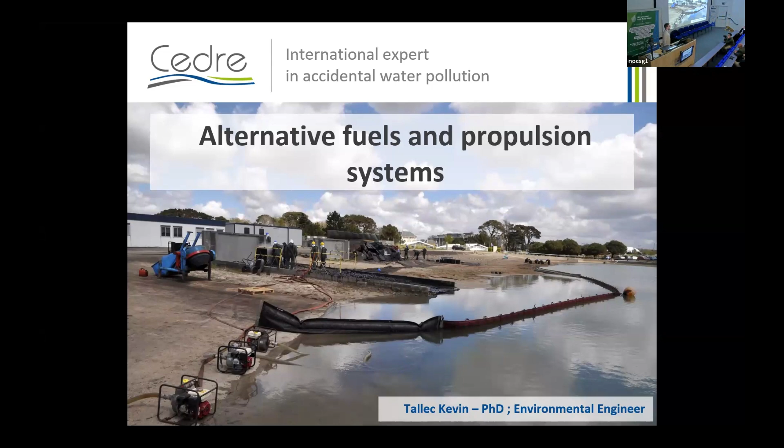So I am Kevin Tallec, an environmental engineer at CEDRE, and today I am talking about the development of knowledge on alternative fuels and their operational responses in case of an accident.

So CEDRE is an international expert in accidental water pollution, based in Brest, France for 45 years with a team of 55 people. And overall, we are working on pollutions in oceans, inland waters and seas, involving plastic waste, chemicals, and oils, and therefore alternative fuels. So now I have finished quickly presenting our activities.

I am beginning my presentation by reminding you of the definition of alternative fuels. So according to the European Union, alternative fuels are all fuels or energy sources that serve at least partially as substitutes for fossil fuels in the energy supply of transportation and can contribute to the decarbonization of the latter, as well as improve the environmental performance of the transportation sector.

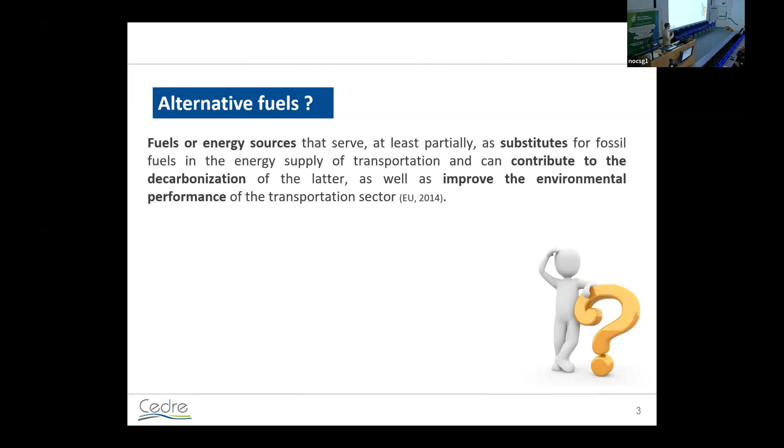In recent years, we observed a fast development of alternative fuels. And on this slide, I have a few examples of the technological advancement. So regarding ammonia, Wärtsilä developed a motor using ammonia as fuel. And they already announced the use of this system for two ships with a delivery by 2025.

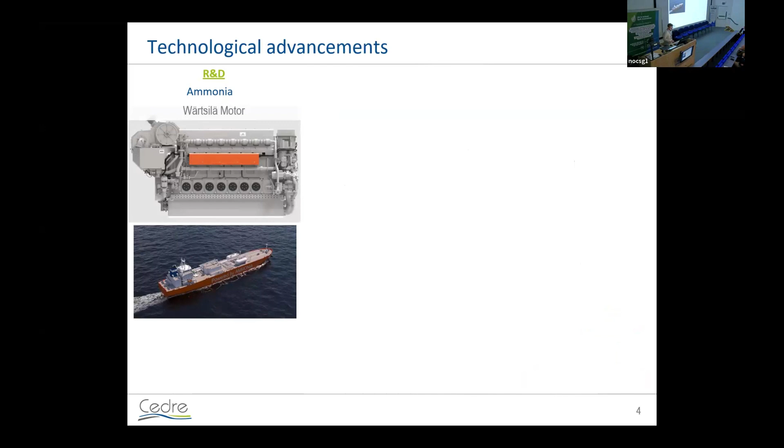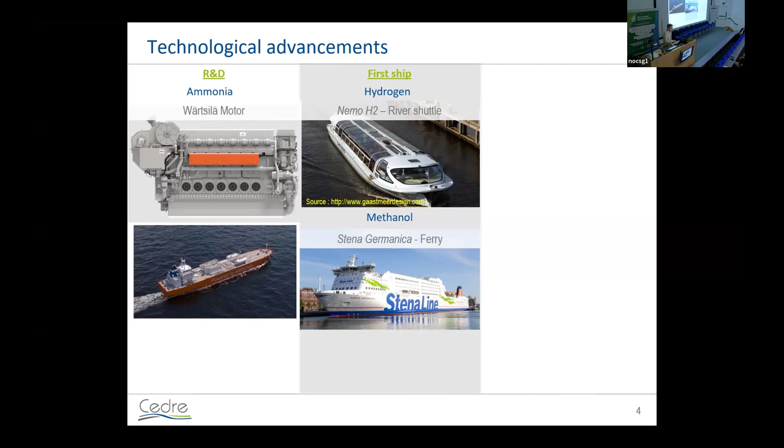Regarding methanol and hydrogen, they have been used as alternative fuels for several years now, with, for example, in 2015, the conversion of one of the world's largest RoPax ferries, the Stena Germanica, to become the world's first methanol-fueled RoPax ferry. And we have several options more extensively developed, like batteries, liquefied natural gas, and low-sulfur fuel oils.

However, although the development of alternative fuels stems from a desire to improve the environmental performance of the transportation sector, the fast development associated with the rapid market introduction can cause operational concerns in case of an accident leading to a spill. This includes managing potential pollution and the environmental impact or impact on human health.

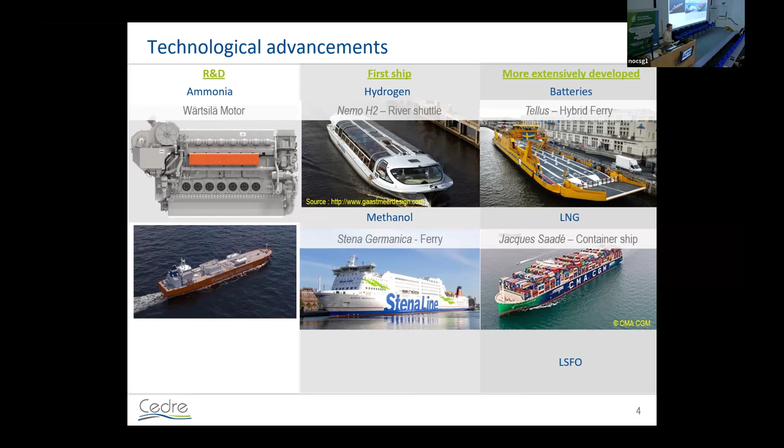At CEDRE, we are engaged in multiple areas regarding alternative fuels to provide advice and expertise in case of an accident. So in our laboratory, we focus on the characterization of the product and its behavior in the environment to perform modeling and drift forecasting. Meanwhile, we test response equipment and we study the adequacy of the equipment for the alternative fuel. And we use these results to produce emergency plans.

And finally, all documents are published and disseminated because we operate as a documentation center, and the documents can be used during emergency responses to provide support and to help operators when it is necessary. Because today we have more questions than answers regarding the operational responses in case of a spill of alternative fuels or an accident of a lithium battery, for example.

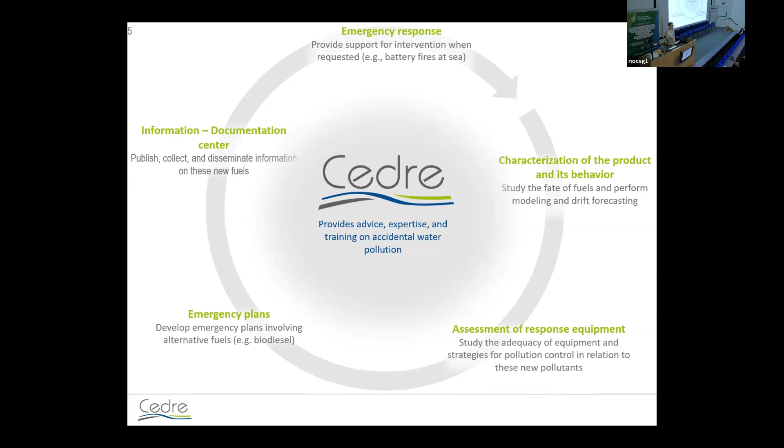The aim of this conference is to present several projects launched at CEDRE about alternative fuels to illustrate the need and the gap to provide appropriate operational responses in the future in case of an accident.

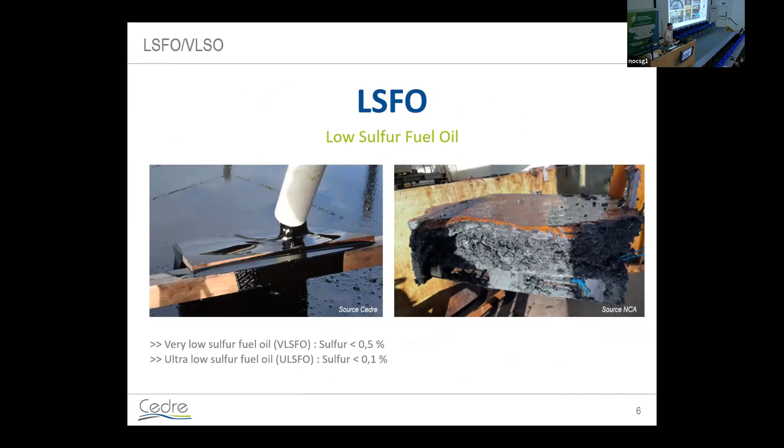So firstly, regarding low sulfur fuel oils, we have the European project IMAROS 2. The goal of this project is to enhance knowledge on the behavior of low sulfur fuels, particularly their mechanical recovery capacities at sea and their impact on the coastline. During the first IMAROS project, we observed low efficiencies of in-situ burning or dispersion as operational responses. Pumping and recovery is the primary response in case of a spill of low sulfur fuel oils.

However, during our laboratory experiments, we observed a large diversity of properties in low sulfur fuel oils, notably regarding the pour point. Therefore, low sulfur fuel oils in the environment can range from solid to liquid, affecting the effectiveness of the pumping and the recovery. Therefore, in the new IMAROS project, we are working with equipment manufacturers to adapt and optimize skimmers to handle the diversity of low sulfur fuel oils in case of a future accident.

Another interesting result in the first IMAROS project was the capacity of low sulfur fuel oils to penetrate into rock. Therefore, in the new project, we will study the persistence of low sulfur fuel oils on the shoreline and the potential impact on aquatic organisms over time.

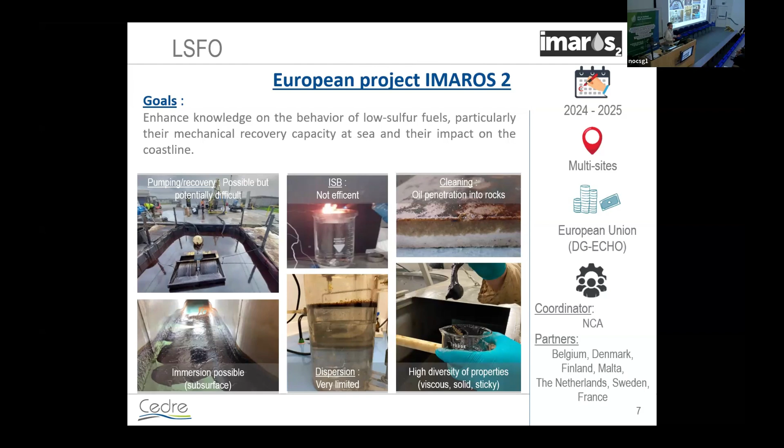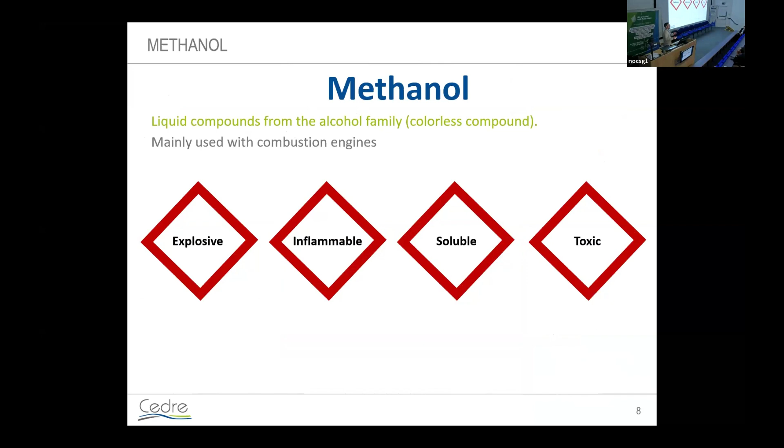Now, regarding methanol, it is an alternative fuel with several interesting properties like explosive, inflammable, toxic. And methanol has the capacity to produce a colorless fire. Therefore, it is very important to study the behavior of methanol in the environment to determine the risk level of an accident.

And in this context, we did last year a project to study the distribution of methanol between the water column and the atmosphere. We did this project in collaboration with the French Navy to spill methanol directly in open seas to obtain the crucial data of this project. And overall, we observed fast solubilization of methanol in water following the spill associated to a limited cloud formation.

This project also allowed the development of a tool to detect methanol in water in collaboration with a Swiss startup. It is a useful tool for operators to determine the risk level and the possibility of a fire in case of an accident. We continue the research on methanol, and we hope that in the future we can help in case of emergency responses.

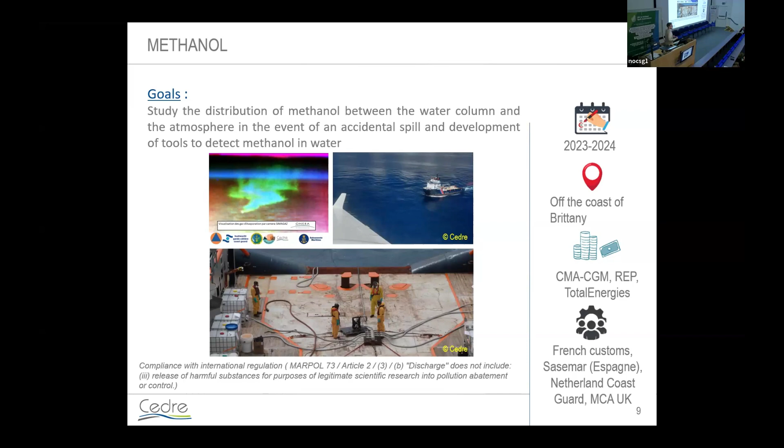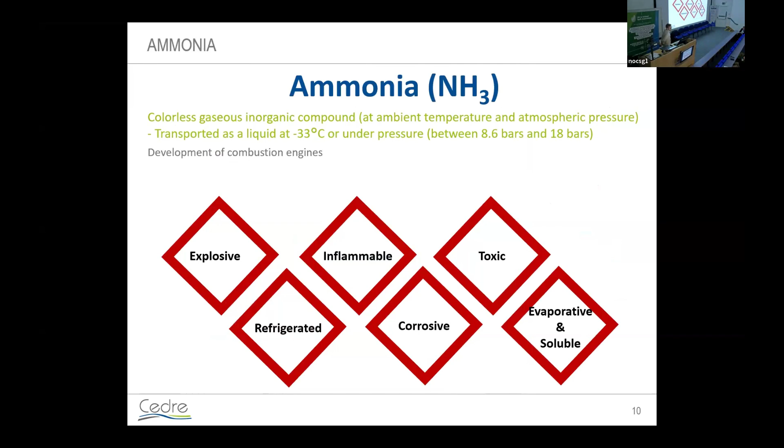Another interesting alternative fuel is ammonia, a colorless gaseous inorganic compound displaying several interesting properties like explosive, inflammable, refrigerated, toxic, corrosive, and evaporative. We know that ammonia is very reactive with water, and heat is generated when the two substances mix. The intense turbulence of the mixing process also generates aerosols, which affects the density of the toxic cloud.

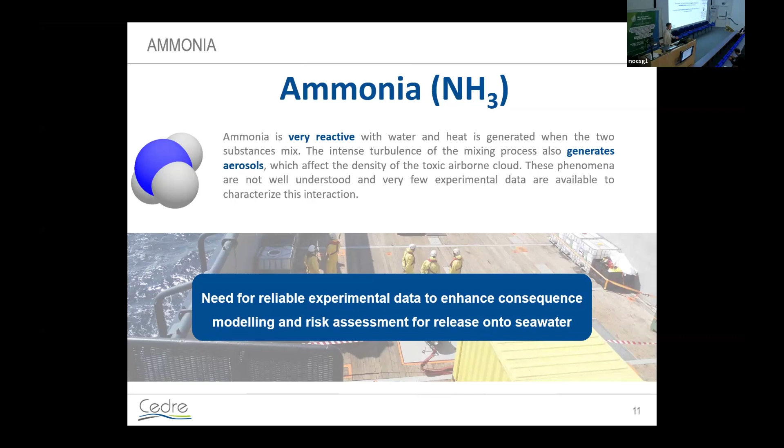These phenomena are not well understood today, and very few experimental data are available to characterize this interaction. Therefore, there is a need for reliable experimental data to enhance consequence modeling and risk assessment for release onto seawater. In this context, we participate in the joint industry project ARISE, and the goal of this project is to establish test protocols and to perform large-scale release of cold liquid ammonia onto seawater in order to test multiple detection and measurement technologies and to acquire the needed dataset to upgrade consequence modeling tools, capability, and reliability.

This project began this year, and the experiment will begin at the end of the year and next year. So we hope that soon we will have results to help operators in case of an accident involving ammonia in the environment.

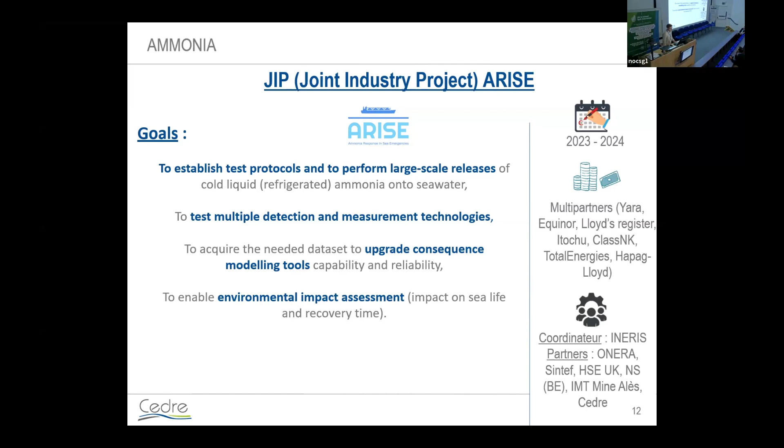And finally, the last example of this presentation is a lithium battery. So by definition, a battery is an electrochemical cell that converts electrical energy into chemical energy during charging and chemical energy into electrical energy during discharging. Lithium battery has several properties like explosive, inflammable, and toxic. Therefore, it is important to consider the risk of lithium battery as an alternative to common fuel.

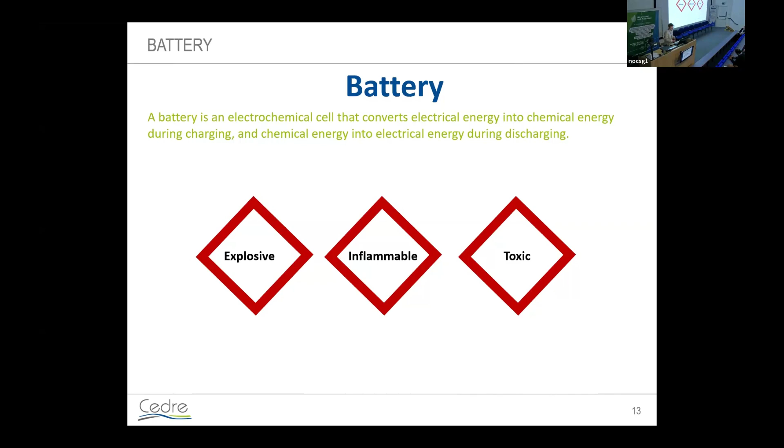And we launched a new project this year to study the composition and potential impact of abused or intact batteries on the aquatic environment in the event of an accident. In this project, we will develop tools to track lithium in firefighting waters and environments. And after, we will study the impact of lithium on several organisms to help stakeholders in case of a risk assessment involving lithium batteries.

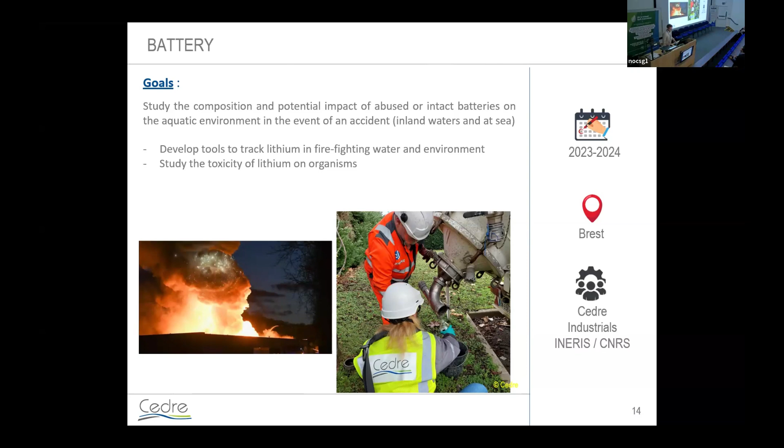Therefore, to conclude this short presentation, the use of alternative fuels tends to increase as well as the diversity of alternatives. We need to improve the knowledge on preparation of responders and crews, and we need to continue the experiments to provide better prediction models and intervention protocols. Overall, the research and the operational responses regarding alternative fuels are in their infancy. Therefore, we need to continue the work.